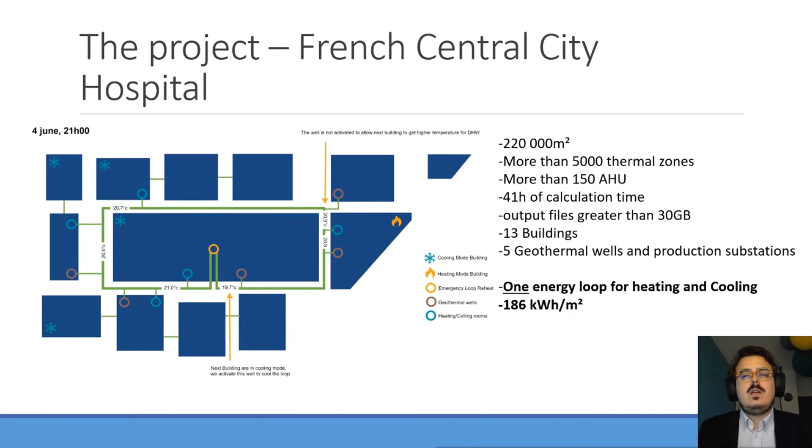Thanks to the system, we anticipate a low consumption of 186 kilowatt-hours per meter squared per year, 3 times less than the existing one. This slide shows the project complexity. This is the DesignBuilder model, including the 220,000 square meter buildings and its HVAC system. For the project, we had to keep this accuracy level inside each building and then represent the loop with all buildings working together. This work had to be done in 6 weeks with 4 teammates.

In a typical building simulation workflow, every engineer models a building and analyzes results on their own computer. This creates a lot of very large simulation files. If any human error occurs, we need to correct, rerun, re-export, and reprocess files. In a normal workflow, the final Excel post-process file is finally useful only for the project. With the new method, we only correct, but the simulation and export time is highly reduced by BI tools.

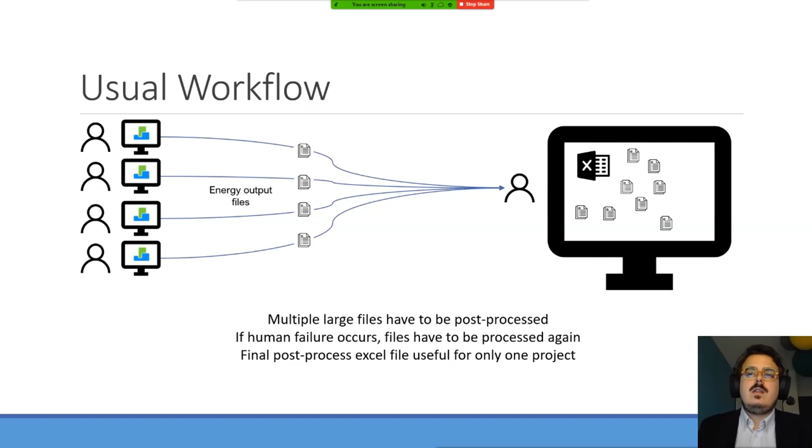In this case, the modeling is done on the engineer's computer, like usual. The EnergyPlus input files are generated from DesignBuilder. Then, thanks to DesignBuilder's simulation manager, we can easily run simulations on one more powerful server to run faster. Then, a script automatically organizes data in a database, in this case PostgreSQL.

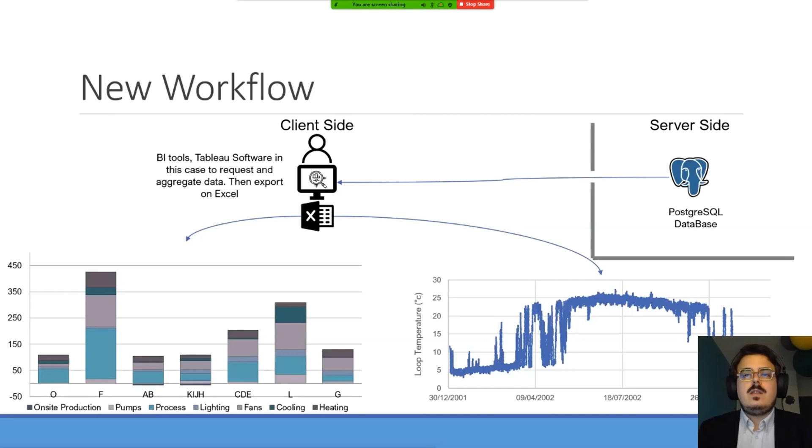When data is stored in a database, BI tools help the engineer to analyze, update, and aggregate the data much more quickly and easily. For this project, we were still forced to use Excel to do the final job, due to dynamic or stepped analysis. But the export is much easier with BI tools' help.

Like I said, we use software available in most companies. DesignBuilder is used a lot in France, and Power BI is included in Microsoft Office licenses.

This slide shows another view of the year's loop temperature analysis. The loop highlighted in green on the right depends on the wells' position and the buildings' mode at time t. So thanks to the previous exports, we have the full cooling and heating demands of all buildings already stepped. After inputting the first temperature for the first hour in green, all the rest is calculated based only on warm and cold rejection on the loop.

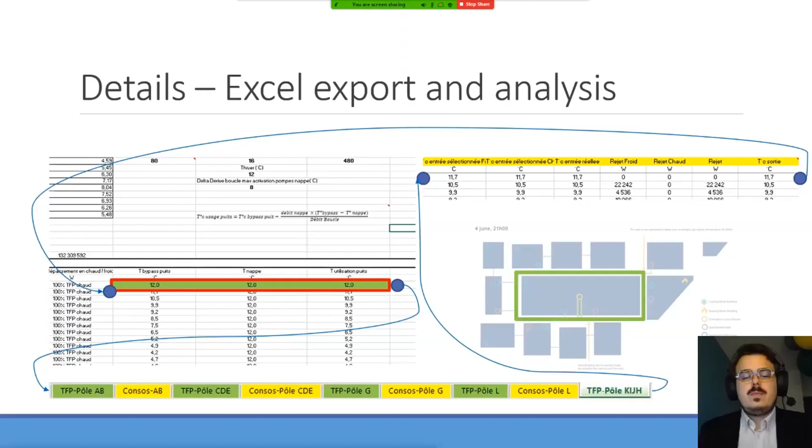To conclude, the project was so huge and complex that we could not have estimated its energy consumption without this innovative method. This shortened our study time by at least 2 weeks. We did some corrections the last week. This could not have been possible without the server. Our study proved that it was possible to guarantee the tempered loop temperature, which was our client's condition to keep this highly efficient system.

At last, the model was used to exchange with the HVAC business unit to adjust and propose good regulation rules and have an appropriate sizing of every production component at building level and district level. So, this method saves significant time and provides an easier way for the design team to share and use the simulation data.

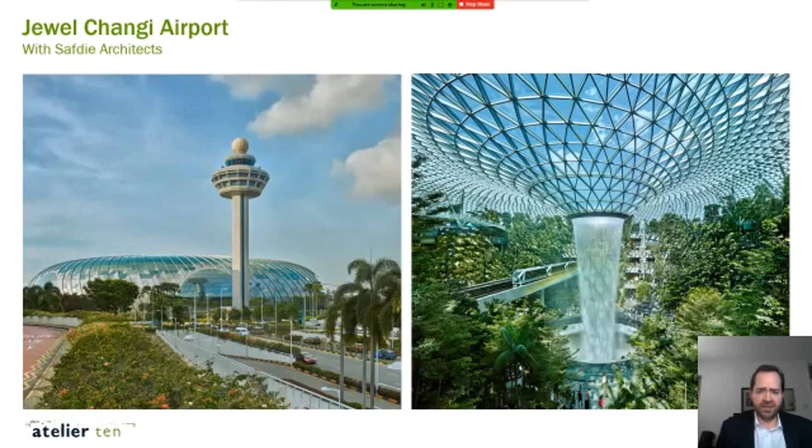Thank you for inviting Atelier Ten to talk about Jewel Changi Airport. The project is located in Changi Airport in Singapore and is fundamentally a retail destination. There's 100,000 square meters of retail and ancillary accommodation, plus a 20,000 square meter covered garden that is fully air conditioned. A key part of our work has been how we could deliver those spaces in an exceptionally challenging climate and an exceptionally challenging internal environment.

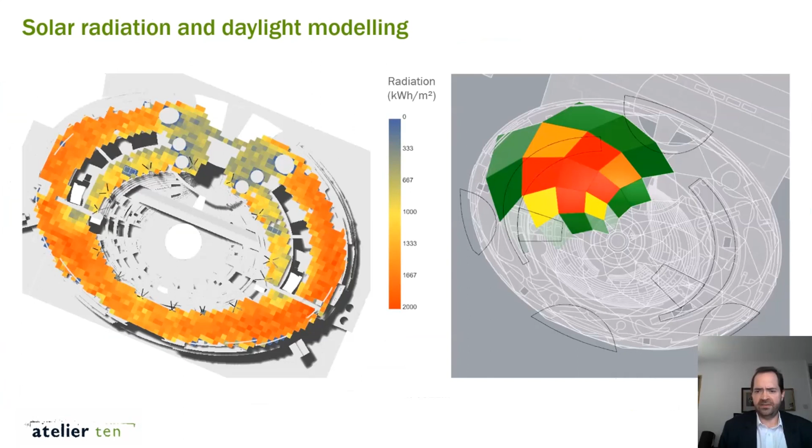We incorporated building physics analysis into the core of our workflow to be integrative and informative to the development of design, rather than just validating whether the design works at the end or not. As part of this, there's a lot of work done looking at daylight access from sky vault views through to detailed mapping of daylight and cladding sensitivity on different areas internally, through to detailed evaluation of how the sun tracks through the space, and detailed evaluations of internal thermal comfort.

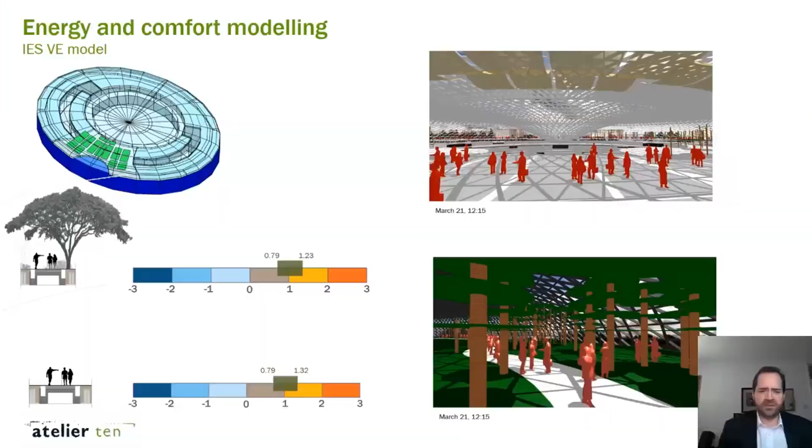However, there were two specific challenges to this project which required particular building physics analysis to resolve. We had the world's largest indoor waterfall, and we had a set of trains running through the building in counterflow, with two trains running each way every few minutes. The waterfall was a particular challenge as, quite simply, it had not been evaluated analytically in any great degree of detail before we undertook the work at Jewel Changi Airport.

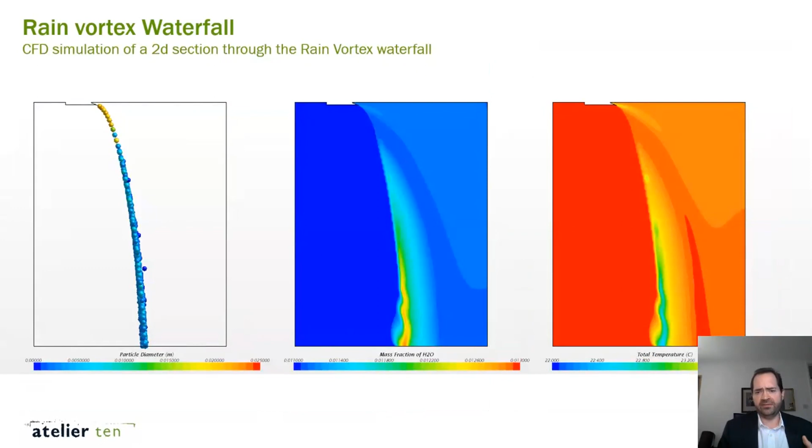We had to evaluate how the droplets of the waterfall would create air motion, and we did this in two ways. We started with statistical analysis, looking at drag factors on individual water droplets and scaling that up. We also looked at a top-down approach of dropping droplets in a CFD model to assess how those entrained air around them. Once we converged those two approaches into a common understanding of the air motion, we were able to merge that from a 2D model into a full building model.

The initial results were not great. We were seeing very fast entrained air coming out of the waterfall, which was far faster than would be comfortable, and would also dramatically de-stratify the space and render the displacement ventilation and conditioning system unworkable.

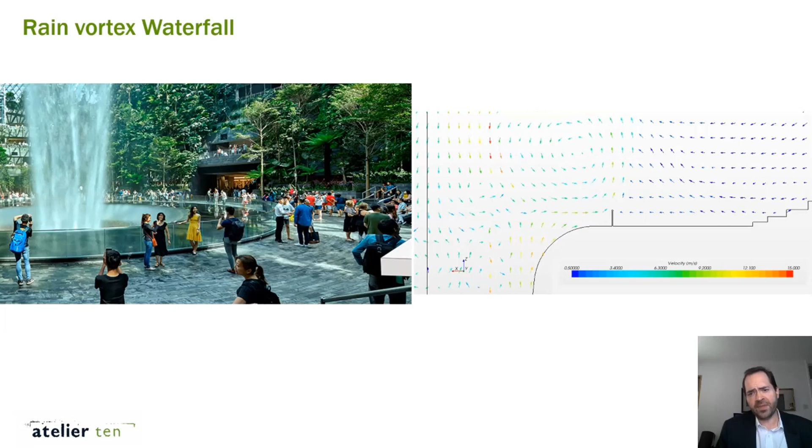Working with the architects, we looked at the airflows projected from the CFD models to develop this quite delicate glass balustrade. As the air comes out of the vortex at the base, it entrains across the surface and is pulled towards the rest of the space. The balustrade simply kicks it upwards vertically and creates its own air curtain from the air movement it introduces to itself. This creates a kind of storm cell inside the vortex of incredibly fast-moving air, but leaves the rest of the space very serene. We tested this through CFD and then validated it through limited physical mock-ups. But without this, the space would have fundamentally not worked.

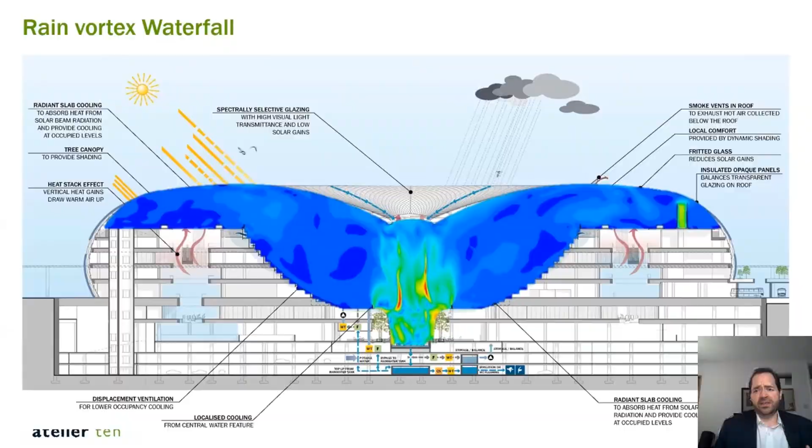Alongside that, we had the challenge of the train. No one's really built a building with trains running through it on a regular basis while still trying to maintain quite close control conditions across the spaces.

We had to look beyond our standard toolset to look at this, and partnered with Siemens and CD Adapco to use some of their advanced clusters to model the effects of the train.

We'd previously identified a need for fast-acting roller doors on the sides of the buildings, but due to the speed of the trains and the frequency, they were not able to fully close before the train passed through them in an airlock configuration.

Using a dynamic CFD model, we were able to assess how much air moved into the building and out of it, and found this very interesting effect: while the train comes through, some air gets dragged behind it. But the counterflow of the train coming out the other way actually helps drag air back out of the building, meaning the net effect of the airflow is relatively minor and could be accommodated through local detailed design of the conditioning system near the throats of the trains' entry into the building.

We worked on the project from competition through to completion, using analysis every step of the way. Through the construction on the site, we continued to validate and work on the analysis, progressing its detail through to the completion of the project as more information became available, making sure decisions made on site were appropriate and responded to what the building needed to do.

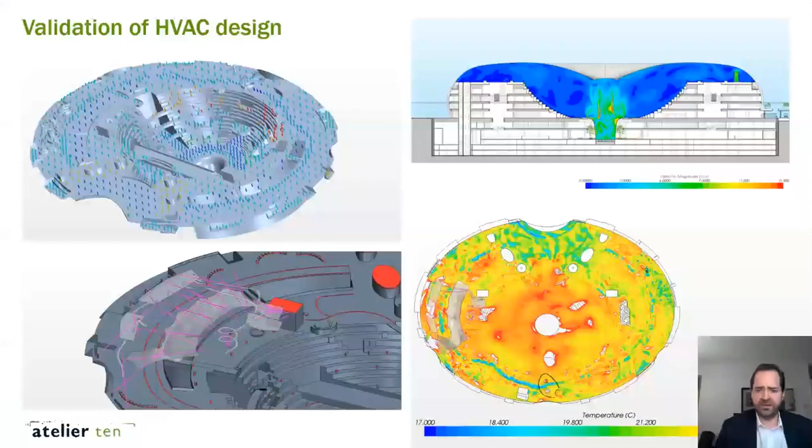When it opened last year, we found this amazing space, the kind you just walk around and people smile, looking with joy at the building. Without the building physics on the project, we don't think we'd have had the same reaction, and we wouldn't have had nearly the same space.

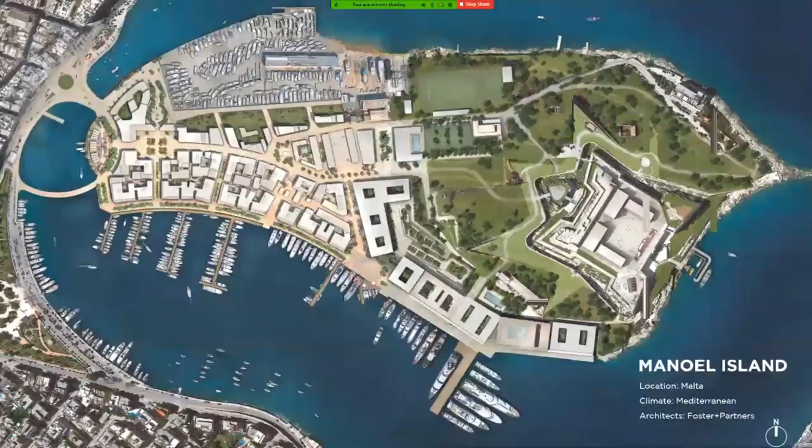The climate is classified as a hot summer Mediterranean climate with 4 distinct seasons. Summer temperatures exceed 30 degrees when it can be quite hot and dry. The winter period is cooler but humid, and there is still a genuine need for heating.

To prepare the sustainability brief for the master plan, we reviewed several international standards to identify sustainability measures appropriate for the project. From this, we developed a bespoke sustainability appraisal framework that included agendas responding to the local context through an amalgamation of best practice measures identified from these standards. As part of the framework, we carried out extensive environmental design work, which I will go through now.

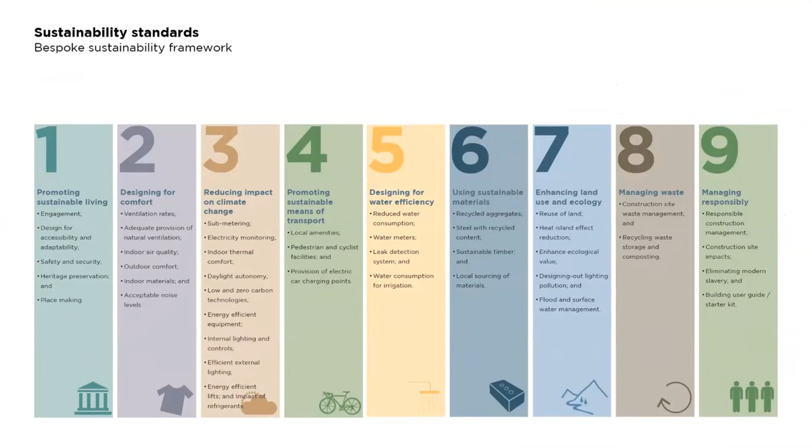We see building simulation as a method to refine a good design into an excellent one. To ensure solid design foundations, we prepared 7 principles for early stage massing, which focused on orientation, arrangement of buildings, scale of courtyards, hierarchy in spaces, shading methods, materials, and creating an environmental transition experience.

Moving on to optimization, we utilized several tools for our simulations. Bulk of the work was done using Ladybug and Honeybee. We used Xflow for running our CFDs and TAS for thermal modeling and validation work.

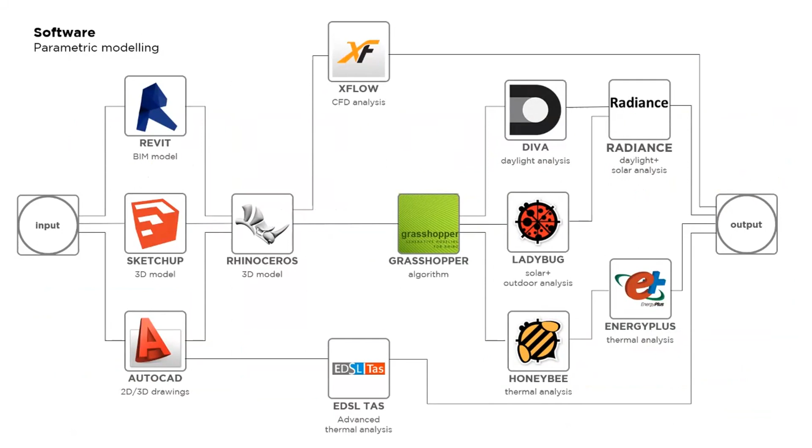Once the initial massing was formulated using the 7 principles, we carried out an early stage shadow analysis to quickly understand its impact on the outdoor spaces and the quality it created. The rapid feedback using this technique allowed us to tweak it before we started applying more advanced techniques.

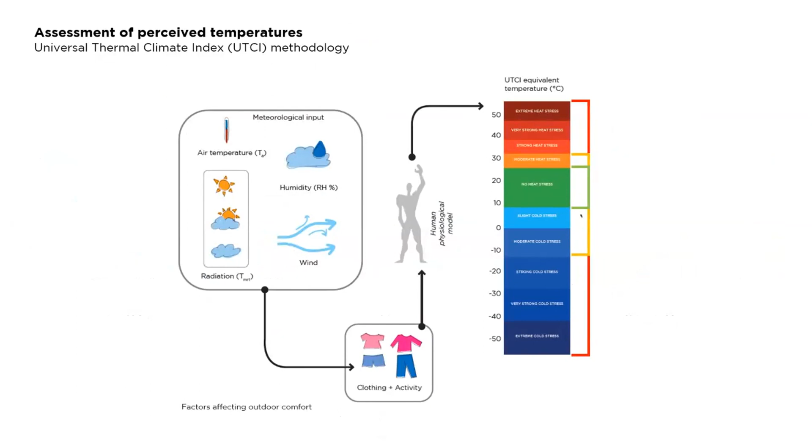With the refined massing, we started assessing outdoor comfort using UTCI to identify areas of heat or cold stress. This was done for a typical summer and winter day in the morning, afternoon, and evening, when the spaces would most likely be in use. This helped identify hot spots that needed additional shading features to enable comfortable outdoor spaces for users.

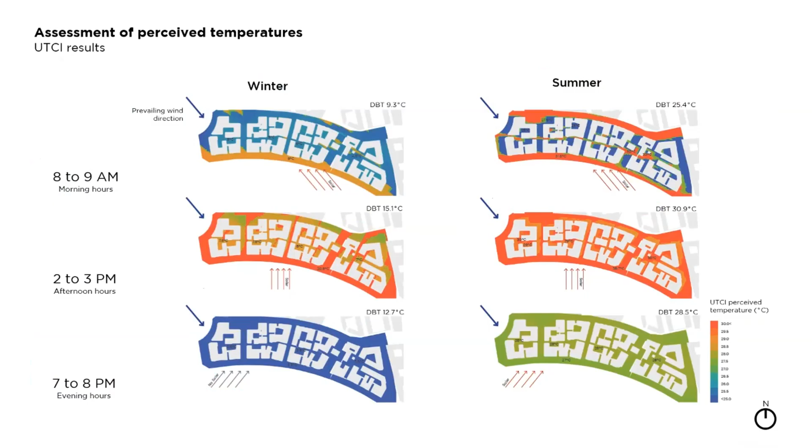We used CFD analysis to check for overly windy conditions that would make the outdoor spaces unusable. Once the courtyards were defined, we did a detailed study of available sunlight hours to identify suitable spots for landscaping. For each location, we assessed the sunlight conditions to assist the botanist in selecting the most appropriate tree species.

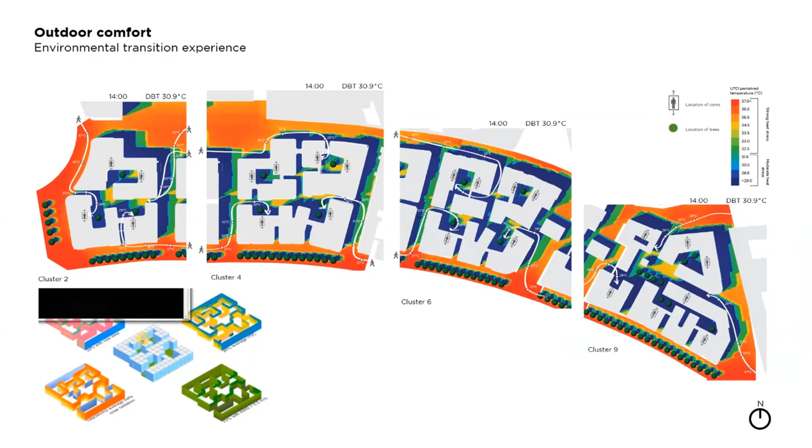We also utilized the UTCI technique to create protected routes. Our design intent was to create a series of shaded and semi-shaded spaces for a gradual change in temperatures experienced by an occupant when moving from indoor to outdoor, to prevent thermal shock. We modulated the massing to ensure there was a gradual thermal transition for the users.

Since vegetation was integral to the courtyards, we also assessed the temperature benefit from the planting. This further helped fine-tune plant placement and pedestrian routes. This render on the left illustrates how we were able to create different microclimatic environments in the courtyards.

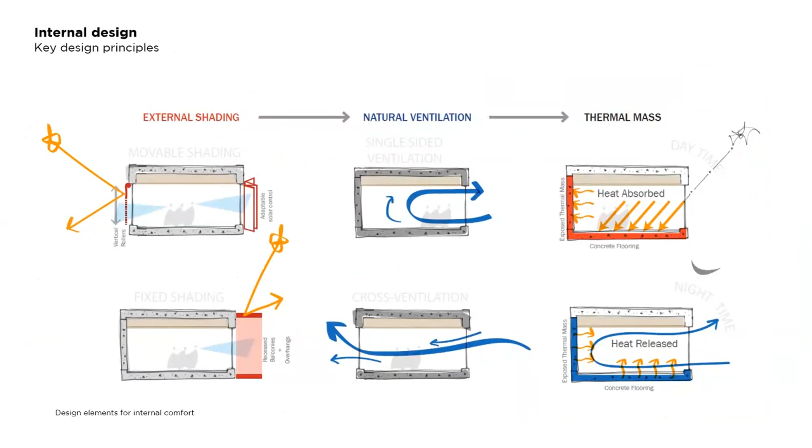Moving on to internal design, we again identified key bioclimatic principles appropriate for the local climate, looking at external shading, natural ventilation, and thermal mass. There were two key design typologies identified by the architect for the design language.

As part of the facade optimization process, we carried out over 2,450 unique simulations and produced a design matrix which captured combinations of orientation, exposure, and glazing proportion for the two typologies.

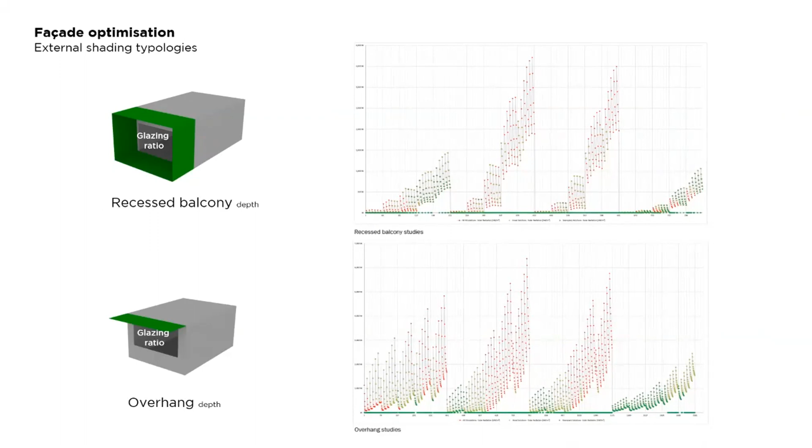With these results, we created a bespoke ranking algorithm to find viable solutions that create the ideal balance between thermal and visual comfort. Using a simple traffic light system, the design matrix helped the architect select the most appropriate facade option for different areas of the cluster.

Once a preliminary option was selected, we carried out detailed analysis on the effective depth of horizontal and vertical projections to find the point of diminishing return of environmental value and energy performance.

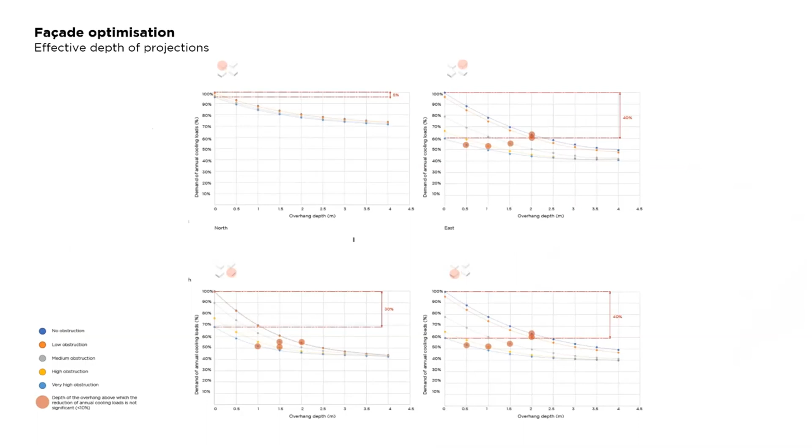For a typical south facade, we achieved a 76% reduction of incident solar radiation and 62% reduction on the west facade. For all orientations, especially east and west with low-angle sun, we assessed different options for glazing and shading controls that will help reduce solar radiation whilst maintaining sea views and privacy.

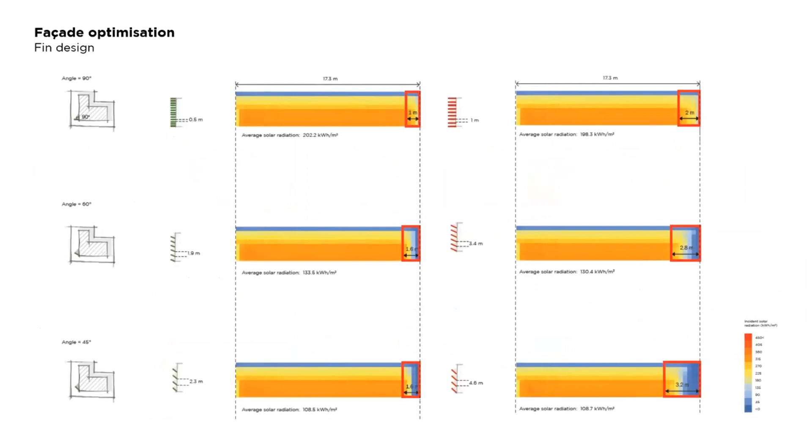We also interrogated the angle and spacing of fins as an external shading element, and as a result, we developed a movable screen on the facade which the occupant can slide across their windows when they want to block the sun whilst maintaining views and daylight.

Towards the end of the design stage, we conducted robust validation checks using dynamic thermal modeling to confirm the performance was as predicted. This was done by testing for overheating risk and to check that we met our targeted potential hours for natural ventilation.

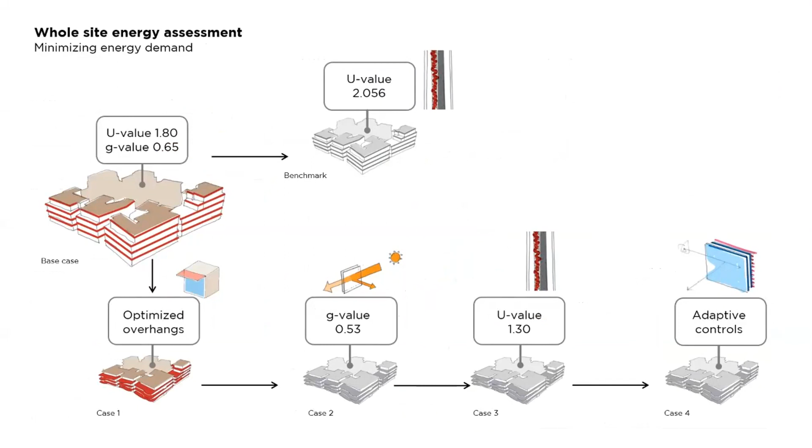For validating visual comfort, we used daylight autonomy as a metric to assess the quality of natural light in the space. Lastly, we carried out an iterative site-wide energy assessment to demonstrate the overall reduction in energy demand by the optimization process. As a result, we achieved a site-wide 40% reduction in energy demand just by passive measures alone. Thank you.

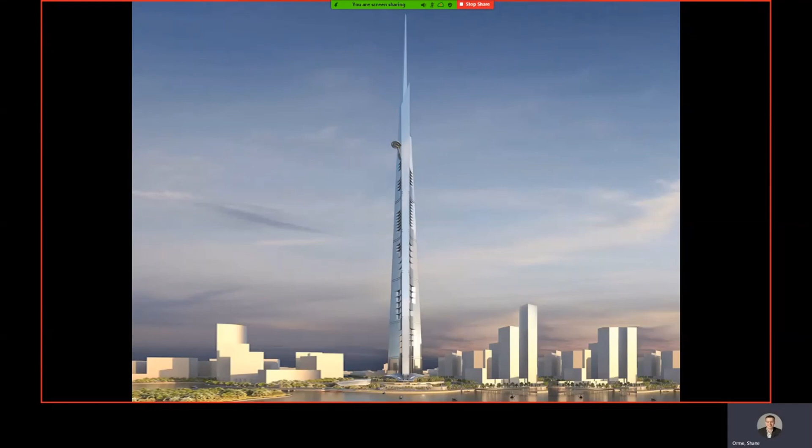Good afternoon, everyone. I'm here to talk to you today about a project I was involved with about this time last year, in which we were helping support the architect in developing their bid to design the world's tallest tower. One of the main design challenges we experienced over the project was the actual height of the building.

You can see here, in relation to some of the other world's tallest buildings, notably the Burj Khalifa at 830 meters, the Jeddah Tower at 1,000 meters, and our building, which over the course of the design project varied between 1 kilometer and almost 2 kilometers.

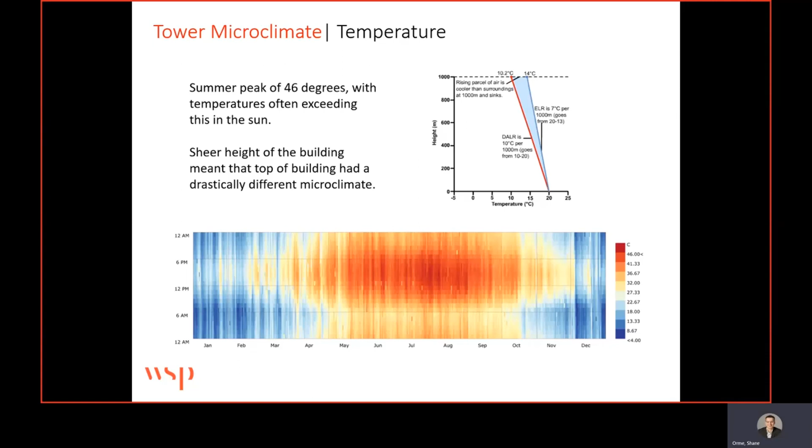The other major challenge was the arid desert design conditions, with a summer peak temperature of 46 degrees and a winter temperature around 5 degrees. Keen mountaineers will know about the dry adiabatic lapse rate, which means that for every 100 meters you climb, the temperature drops by about 1 degree. This meant the top of the tower had drastically different design conditions from the base - about 15 degrees cooler in the summer, but also at risk of freezing for large parts of the winter. So we had a constantly changing concept design, a very aggressive 3-month project timeline, and very challenging environmental conditions.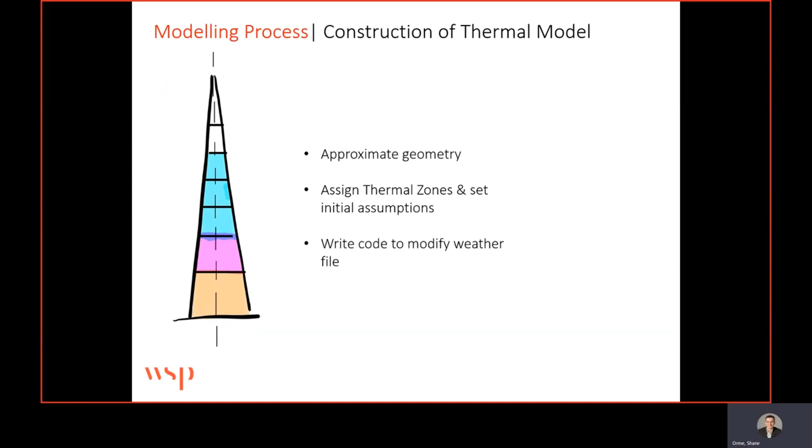We were given information from the architect in the form of building height, building width, and typical floor plates, so I thought this would be a perfect opportunity to develop a parametric model using Grasshopper, Honeybee, and Ladybug modeling suite. Using this, we were able to approximate the building geometry, assign thermal zones, and set MEP assumptions for each building zone. We wrote a piece of code to modify the weather file so the environmental conditions were different for each floor of the building.

So we were able to simulate each floor and then iterate this simulation up the entire length of the building in order to come up with the total building heating and cooling loads, as well as run daylight factor simulations and a radiation massing study.

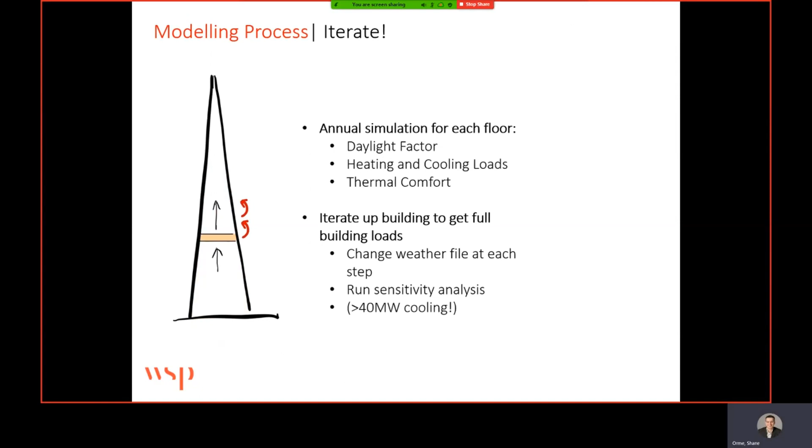Overall, we were able to receive design information and generate a series of design outputs, running a series of sensitivity analyses, including a surface radiation study, daylight factor analysis, and concept energy analysis. We were then able to feed this information back to the architect to inform design decisions in an iterative process.

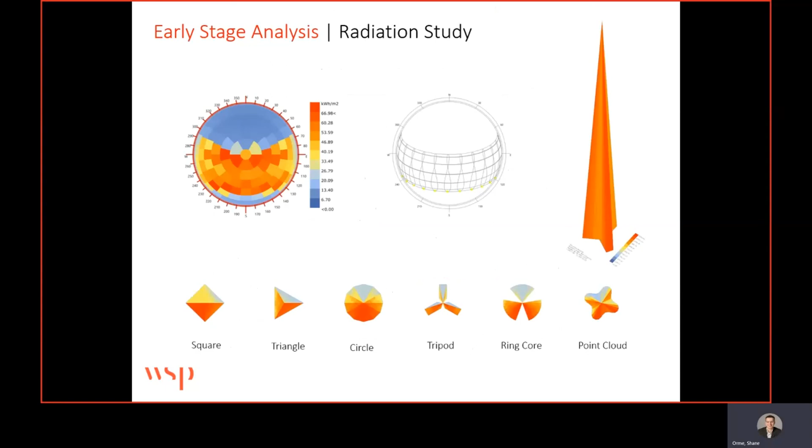The first thing we did was an initial radiation massing study where we looked at different forms of the building. We found that a triangular or tripodic building form had better overall radiation performance versus a more traditional square shape, triangle, or circular shape.

We also ran a daylight factor and cooling load analysis. This highlighted that the very deepest office floor plates had very little access to natural light.

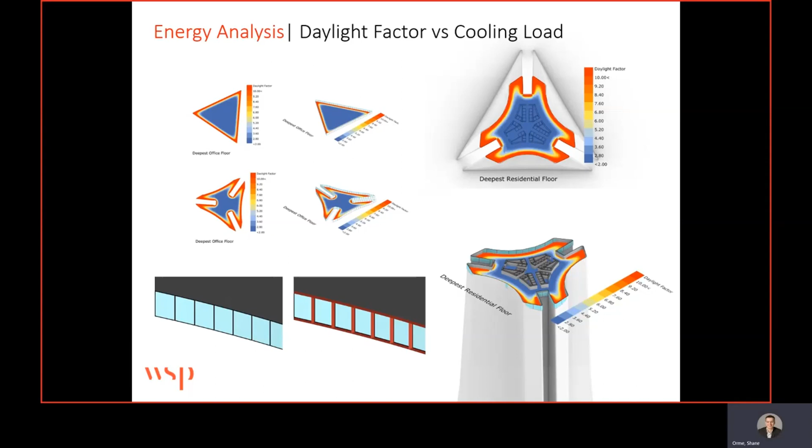So one strategy proposed by the architect was to introduce slots into the building, which had the combined effect of increasing the daylight factor and access to natural light, while not significantly impacting the cooling load.

So we've been developing this model for about a year since then. We've added a few extra features. In addition to running sensitivity analyses, we are now able to run optimization studies of these different design decisions based on a genetic evolutionary algorithm.

And we've also extended the capability of the model to start looking at some more detailed design decisions. Some of them are shown there on the side.

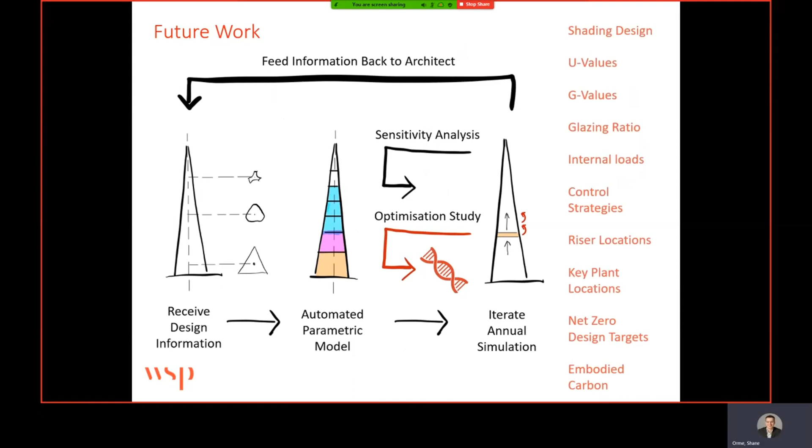Right, I think that's about all I've got time for today, but I'd just like to thank everyone for listening, and I'll happily answer any questions. Thanks.

Very good presentation. Thank you very much, Shane.

I've got two questions. The first was, I'm quite interested to know a little bit more about the code in terms of altering the weather file and then how you simulate that to apply across the height of the building. And the second was whether you considered any beneficial gains and losses associated with where you are in the building and the height of the building, and how energy could potentially be shared.

Yeah, so that's a good question. Basically how the simulation worked was that it did a typical floor of the building. So it calculated each floor of the building separately and then iterated that process as you climbed the building, repeating it on each floor.

The geometry would change as you shifted up the building. We also had a program schedule from the architect, because it was a massively mixed-use building. So we had offices, a 5-star hotel, residential buildings, lobby areas, which all had different MEP input assumptions, so different loads and things like that.

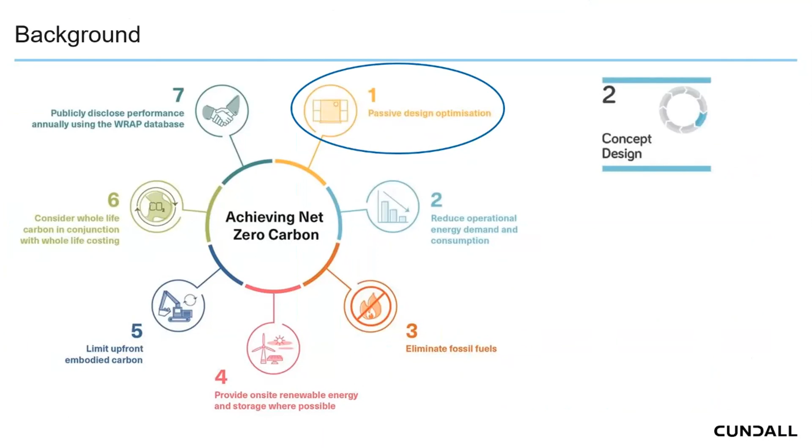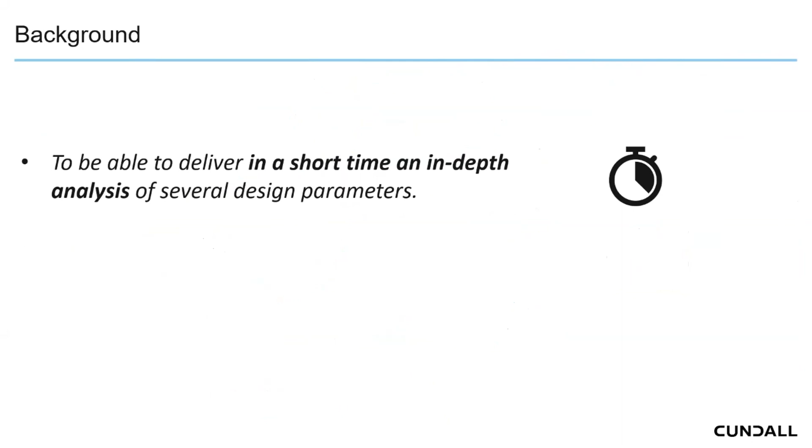Several design features have to be investigated at the early stage through the lens of energy use, daylighting, and thermal comfort, as well as resilience under future climate scenarios. To achieve this level of detailed design at early stage, we have been developing tools to automate and optimize design workflows, from energy calculations to daylighting and thermal comfort assessments. With the following objectives in mind: to be able to deliver in a short time an in-depth analysis of several design parameters, and to reduce time spent in tasks that don't have any engineering value and increase time spent in analyzing the results and their impact on the design.

When assessing thermal comfort, to validate the efficacy of a design, 3 main methodologies are used in the UK, and these are CIBSE TM52 for commercial buildings, CIBSE TM59 for residential buildings, and BB 101 for primary and secondary schools. IES is one of the software most used in the UK industry to carry out these assessments. Within IES, it's possible to produce an Excel report for TM52, but not for TM59 or BB 101 methodology. To calculate this, as well as the impact of different internal airspeeds, additional calculations have to be carried out in Excel, which is an extremely time-consuming task.

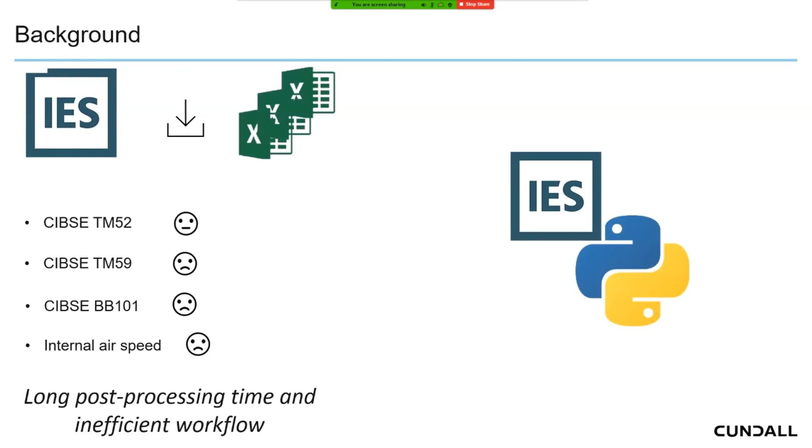Luckily, there is a Python environment within IES that allows the development of customized scripts. What I did was to develop a script to optimize how we carry out these assessments. The first objective was to embed all calculations for each assessment within the script, to be able to run multiple weather files, to embed calculations for several internal airspeeds, to output the results in a user-friendly format, such as Excel, and to develop a script that can be used by any IES user without any Python knowledge.

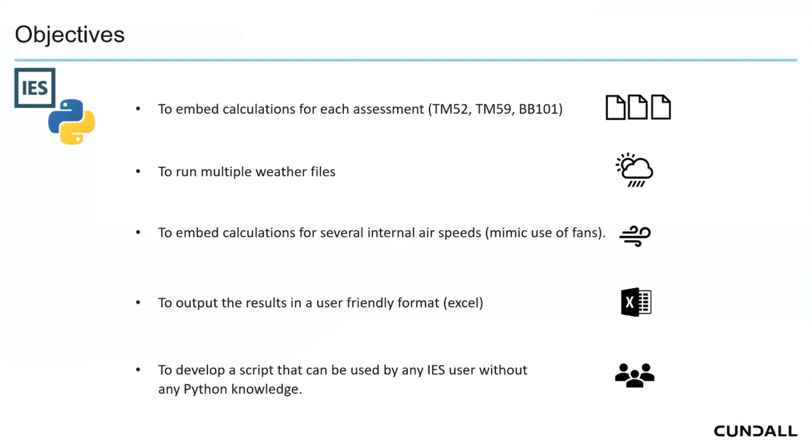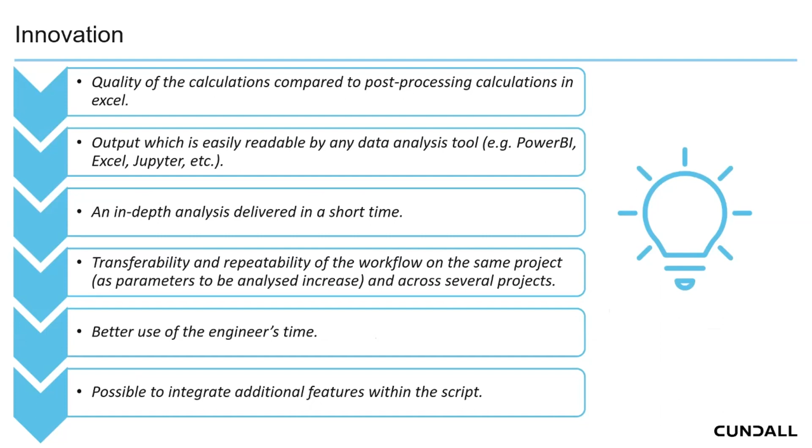The use of this workflow guarantees quality of the calculations compared to post-processing calculations in Excel, an output which is easily readable by any data analysis tool, an in-depth analysis delivered in a short time, transferability and repeatability of the workflow on the same project and across several projects, better use of the engineer's time, and the possibility to integrate additional features within the script, such as calculations that go beyond the methodology requirement.

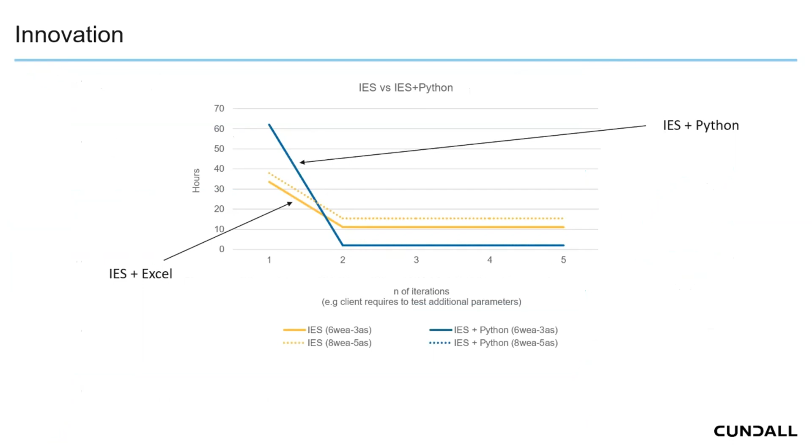This graph shows a comparison between a traditional workflow, which is IES and Excel, and the developed workflow, IES and Python. On the y-axis, we have the time, and on the x-axis, we have the number of iterations. Assuming we have to start from scratch in both cases, writing the Python script requires a longer development time compared to setting up the same calculations in Excel. However, as the number of iterations increases, in the Python workflow, the time required to complete the same task is a small fraction of the time required to carry out that task using IES and Excel. And as the number of parameters to be analyzed increases, the gap between the two workflows is even bigger. This shows how the use of the developed script highly increases efficiency in delivering these tasks, making best use of the engineer's time.

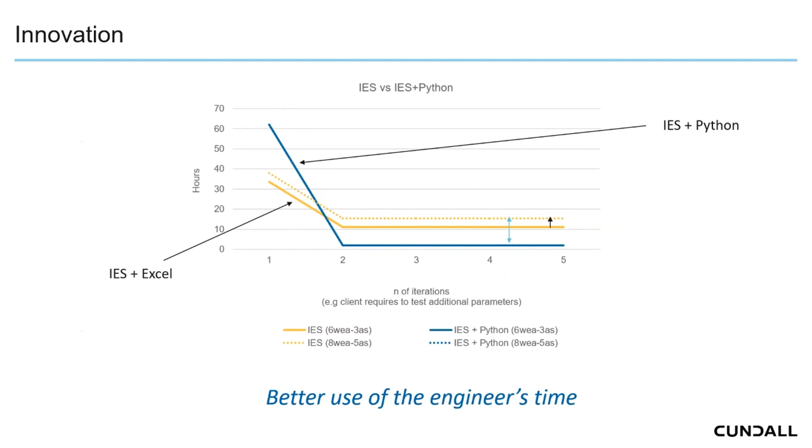This workflow has been used on several projects for residential, schools, or commercial buildings. Among these, a number of net zero school projects we have been working on in the last months, where the analysis of several parameters and climate scenarios for different locations in the UK was required at concept stage. The use of this workflow across projects shows one of its strengths, which is transferability and repeatability, as well as the capacity of delivering in-depth analysis in a short time.

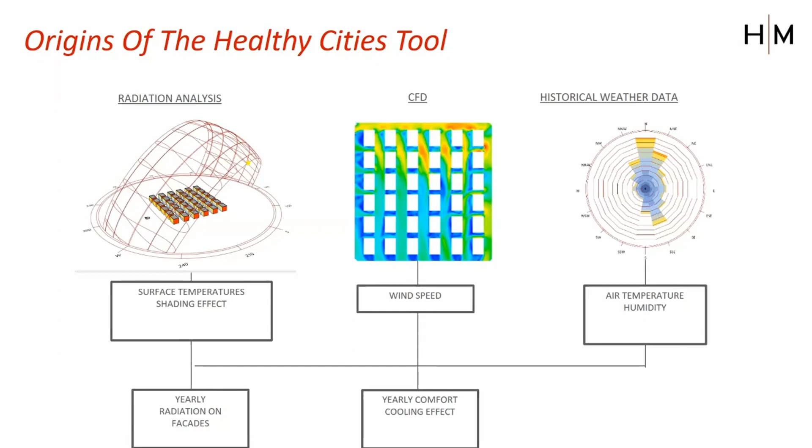So we used Rhino and Grasshopper not just to coordinate the geometry, but to run the simulations directly within the Rhino environment. Then over the last couple of years, having established a decent platform, we've started bringing in other environmental assessments like acoustics and air quality. And you'll see in a minute how South Korea made good use of those. And also the ability to very quickly compare designs with a design explorer.

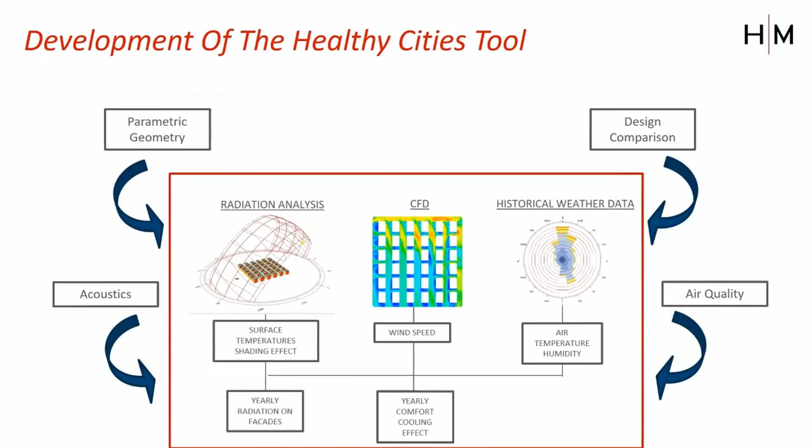Korea is at the eastern end of the Asian continent, so it's got a very continental climate, very hot summers, very cold winters, so challenging thermal conditions. Also, there's a lot of pollution coming not only from Chinese industry, but also a lot of dust coming off the deserts over there. And in the Korean cities, there's a fair amount of traffic issues, and that affects not only the pollution, but also the acoustics as well.

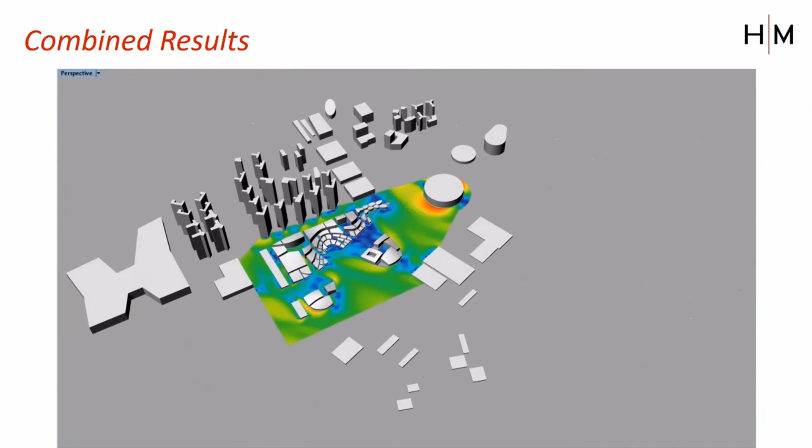So here's a brief overview of the master plan that we were working on, in particular the top end of that image. There's a plaza area in amongst the pink blocks. It's a bit difficult to really show how we drive the models from within Rhino in a presentation like this, but you'll just have to take it from me that these results aren't images that are just within the Rhino model. They're actually being driven and produced within the Rhino environment.

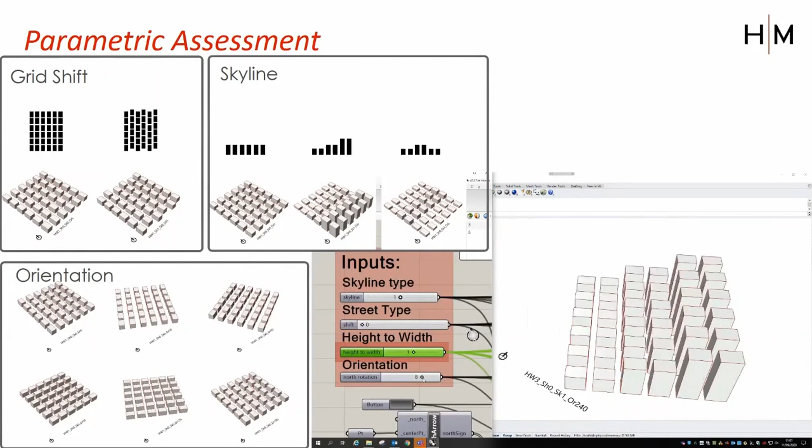The other thing we've done on this project is a parametric assessment using the local climate data to look at how the streets should line up in their orientation around the compass, but also whether the highest building should be in the middle or at the outside edge, and whether the city street grid should be shifted maybe. And we can discuss the various pros and cons of these things with the architects, the clients and the stakeholders, particularly by using the Design Explorer that I mentioned. This one's looking at various levels of thermal comfort, but it can also apply to getting a balance between thermal comfort and acoustics, where these are sometimes competing metrics.

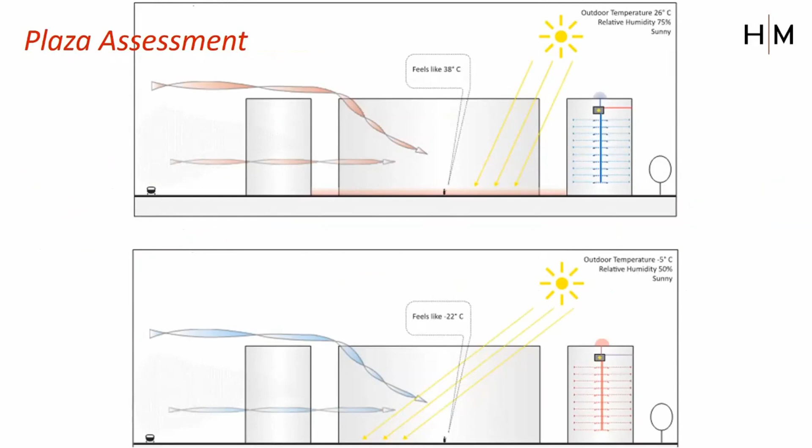And then finally, I'll take you through the overall nature of the design process that we went through. So this is how the conditions would be felt if the city blocks were just straightforward extruded blocks all at the same height. You can see that in the summer it feels like 38 Celsius, and in the winter it feels like -22. So very challenging conditions.

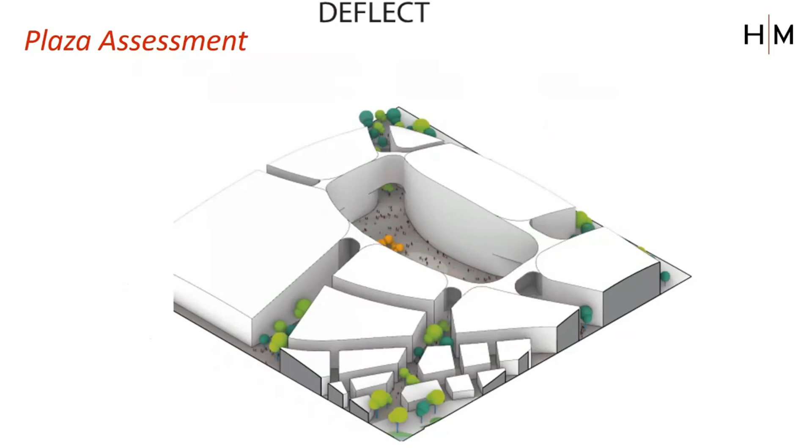But by optimizing the overall shape of the master plan, making it higher in the middle and lower at the end so that the wind flows over the top, by deflecting the wind that is steered down the canyons, this is all about optimizing conditions in the plaza space, by blocking off those canyons at a higher level, and also by adding just a little bit of solar shading, which also helps the aerodynamics of the buildings. We're able to add a fourth thing in addition to optimize, deflect and protect. We're also able to take some of the air from the buildings and blow it into the plaza area to slightly pressurize the space.

And because of all the shielding that's going on, in the summer we've got the conditions within the space down to about 25 Celsius, and in the winter we've got it up to about 0 Celsius. And the client was extremely happy with these indications.

And just very quickly, I know I'm a little over time.

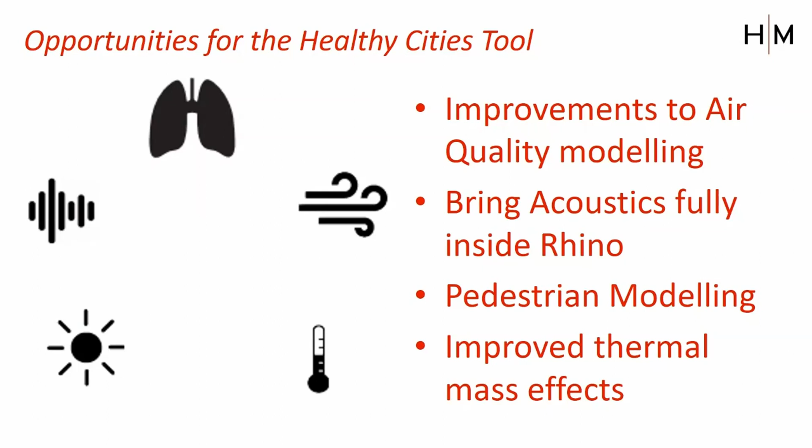Some of the things we're working on to improve the Healthy Cities tools: improving the quality of both the air quality and thermal mass modelling, improving the accuracy of the modelling there. Also, the acoustics at the moment still has a little bit of human intervention, but we're hoping to bring that to a close. Thanks very much.

Thank you very much for that presentation. Again, a lot of information there in quite a short period of time, Joseph. What I'd quite like to ask about is the acoustic aspect. Acoustics and acoustic modelling is something we don't do enough of, I believe. So could you tell us a little bit more about that in terms of how you modelled it and what the key variables were?

Well, the work we're doing, it's all very, very early stage. The acoustic modelling is mostly done with CADNA, and the models are generally set up through Rhino. There's still a bit of work, as I said at the end, we're trying to bring that inside the Rhino environment. There's still a bit of human intervention that's needed.

But the models are very simple. Just to give an indication of the impact of traffic, we're doing some impacts of softening walls, that kind of thing, and porous screens. It's not very detailed, the acoustic work. It's one of those things where with this platform, we're starting to keep things very simple and then grow them from there incrementally rather than put a great deal of detail in at once.

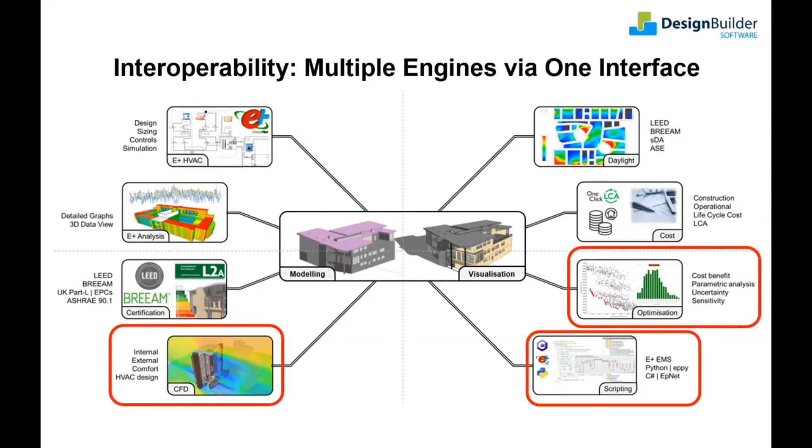You can improve interoperability in two ways. Firstly, by one interface interoperating with all the calculation engines a modeler requires, using one model for certification, energy, comfort, daylighting and CFD simulations. That's been the approach used by Design Builder. But advances in technology and changing design practices are pushing this approach to its limits. I'll use examples including CFD, optimization and scripting to explain why.

Design Builder's current CFD engine can meet most common building-related CFD needs, but it can't model particulate flows or pathogen dispersal and containment measures. The pandemic has increased the importance of these aspects. To help us meet these and other requirements, we'll soon be providing a user interface for the well-respected OpenFOAM CFD engine. So from one Design Builder model, you'll be able to generate OpenFOAM results and input and output files, alongside the Energy Plus and Radiance results and files already available, including your Energy Plus results as CFD boundary conditions. That should minimise the need for data transfer between different simulation tools.

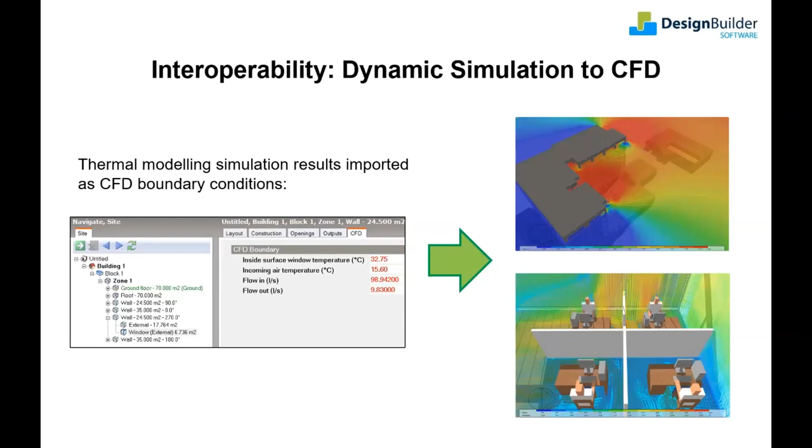We're now actively developing software to improve data transfer between tools, including via an API we released recently. The API allows users to develop their own applications to interoperate with Design Builder. The API and wider interoperability capabilities will be enhanced in the months and years ahead.

The increasing complexity of building HVAC and control systems has increased the need to customize some simulations, normally via scripting. In its basic form, scripting allows the user to pre- or post-process simulation data, for example, to produce specific output reports. A much more powerful application is to use your script to modify the model behavior at each time step during a simulation. So, for example, you could replace the simulation engine code with the manufacturer or design team's control logic to ensure the simulation matches real-life equipment operation.

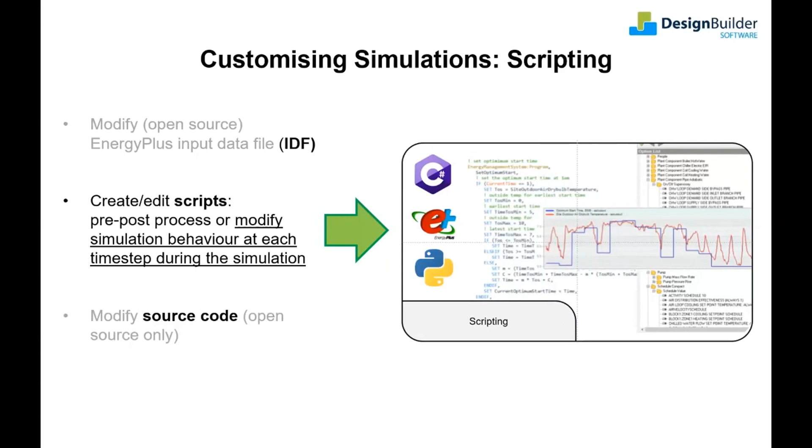Optimization is a capability enhanced by the availability of cloud computing. You set up the optimization model on your local machine and then run the simulations much more quickly on a network or cloud server with multi-core processors running simulations in parallel. We'll be extending cloud computing beyond EnergyPlus simulations in the years ahead.

Last but not least is existing building calibration. Calibration develops a design stage model so it reflects operational reality, helping building managers to optimise operational performance, including energy efficiency and occupant comfort.

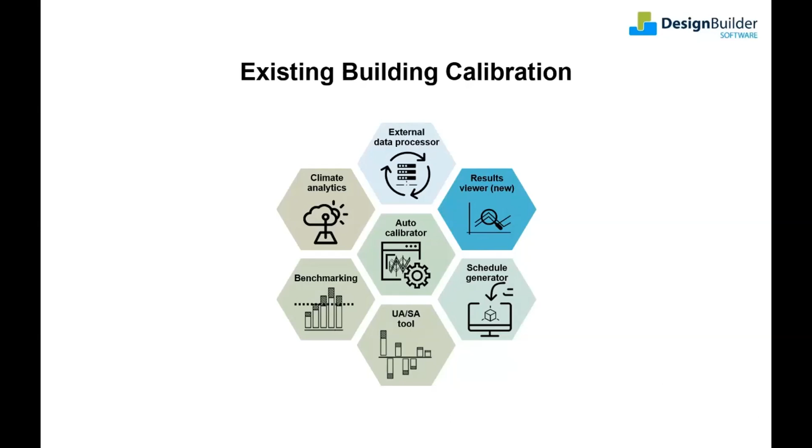Calibration was discussed in the recent TM69 operational modelling webinar we did with CIBSE, and the recording is still available from both the CIBSE and DesignBuilder websites.

Hopefully you found this glimpse into the near-term future interesting, and it's given you food for thought going forward.

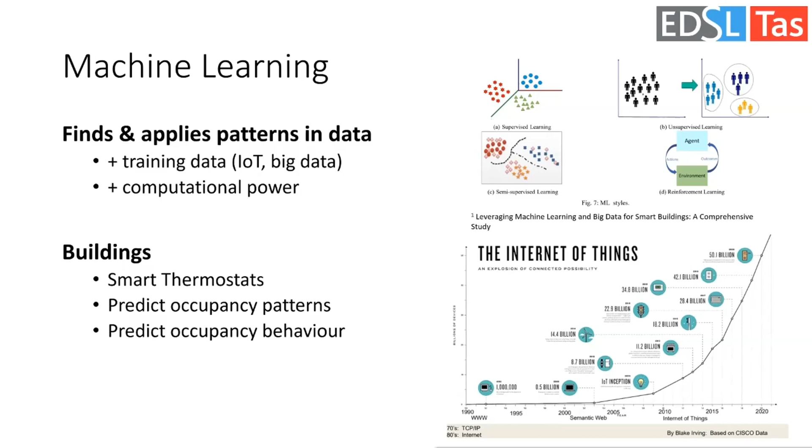In terms of building design, we need to be able to simulate the operation of these machine learning models. We can also use machine learning to speed up simulation times and even help people create their digital models faster.

Another area that's gaining interest concerns modeling occupant behavior. Currently, we tend to model occupancy and equipment gains as static, but in reality it tends to be much more stochastic. Occupants tend to enjoy their environment more if they can interact with it by adjusting lights, thermostats, blinds, and windows. And they also affect the small power consumption. And uncertainty from occupants is very costly.

One study demonstrated that sizing a PV array to be 99.9% certain of net zero energy costs 50% more than one that is 90% certain. It's therefore very important that simulating occupant behavior leads to robust design. We need to make it very difficult for users to make inappropriate decisions.

You may have seen the smart glass used in toilets in Tokyo. The same technology is very useful in buildings, particularly if the solar transmittance can be controlled independently to the light transmittance. We could have facades that allow the sun to provide more heat in the winter and reject it in the summer based on weather forecast predictions. And again, the control of these systems is something we'll need to be able to model in order to refine the design.

There are also continuous advances in energy storage technologies. Take batteries, for example. Different batteries have distinctly different characteristics. If the population shifts to primarily electric vehicles, we may be able to use the car batteries in the building's parking area to smooth out peaks in the energy demand where renewables are relied upon. But we'll need to make sure that we give the employees enough power to drive home with.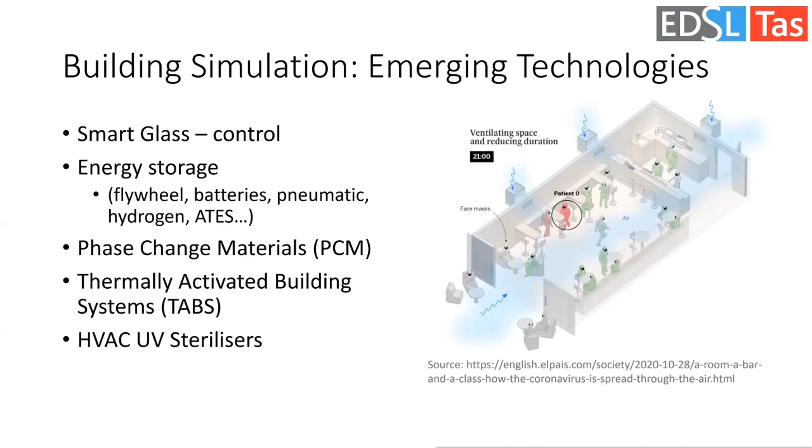As usual, raw computing power continues to increase, and with that comes opportunities. Wind pressure coefficients and openable proportions tend to be a big source of uncertainty in natural ventilation calculations. We can more accurately estimate these using modern fast CFD for both exterior and interior modelling.

We can start modelling CO2 factors that vary throughout the year. We can implement algorithms that generate future weather data from arbitrary weather data, such as data gathered by on-site weather stations. We can attempt more ambitious optimization and parametric design projects, though we'll need to spend some time thinking about how to present the vast amounts of output data to our users, because sometimes a lot of data can be a bit overwhelming. And we can combine a number of techniques and technologies to provide real-time results while we're actually creating our geometry, such as daylight calculations.

Accurate glare analysis is particularly important if we're modelling occupant behaviour, as occupants tend to put the blinds down and leave them down, even when the risk of glare diminishes, so it's important that we avoid glare in the first place. And we can increase the temporal resolution of our simulations in order to capture some of the more intricate interactions between buildings and their occupants.

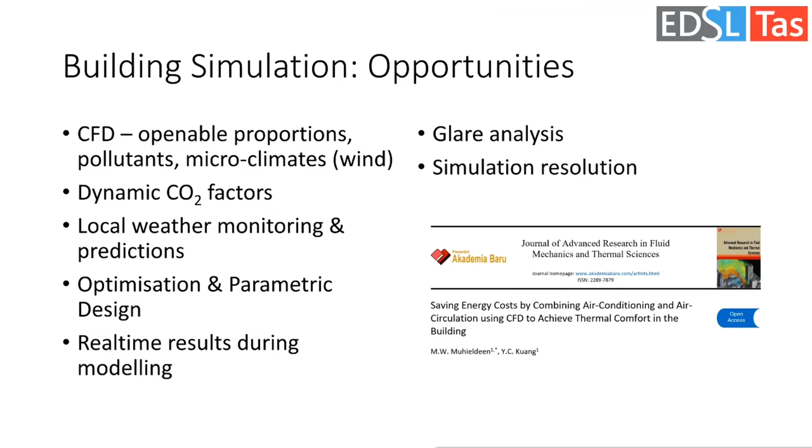Last but not least, one very significant opportunity lies in calibrated energy models of existing buildings. If we're going to reach our low carbon goals, existing buildings will need aggressive renovations, but sometimes it's hard to justify significant changes to envelopes and HVAC systems when the initial costs are very high. By creating digital twins of buildings, we can accurately predict the effect of renovations and calculate relatively accurate payback times. We can also quantify how much has actually been saved after undertaking renovations and connect this model to their building management systems to take the improvements and monitoring further.

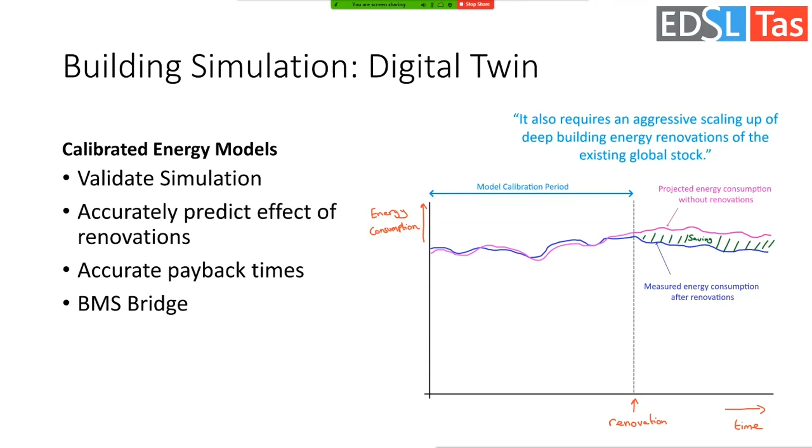I know I've covered quite a lot at a high level and have been quite ambitious about what I think is possible in the next 10 years, but I think we're going to have to be in order to have a real impact on climate change. After all, buildings are quite long-lived. I'll make these references available somewhere in case you want to look into anything I've talked about in more depth, and I look forward to your questions.

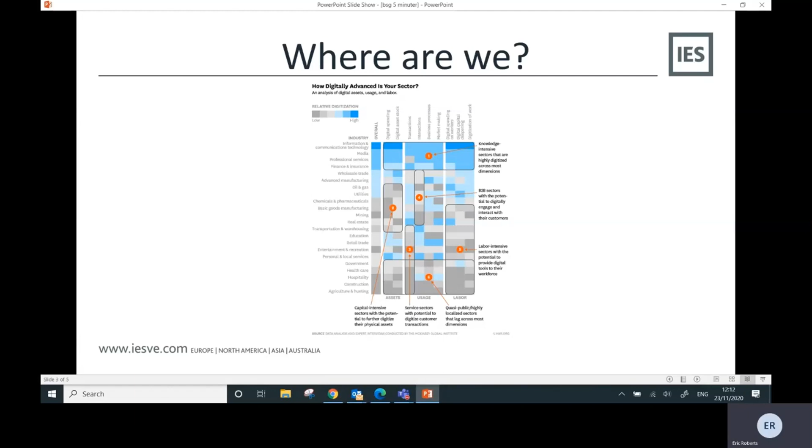So where are we going to be going? How can we do that? Whilst we've come a long way in the last 20 years, moving from a paper environment into a digital, hopefully 3D environment, but not in all cases, where are we actually going to go?

We've brought the use of building simulation from quite a niche activity, although somebody may argue it's still a niche activity within the construction industry. We've been looking at one building at a time. Predominantly, its growth has been compliance and regulatory driven, directives forcing implementation, more of a stick than a carrot. Energy has been cheap, and is still relatively cheap, and developers aren't the end users of buildings, they're selling assets on. They're not bothered about the long-term running costs.

As we move into a realm where we're looking at decarbonisation and low and zero energy buildings, we need to start looking at a wider and longer term time frame than this. We need to go from one building at a time to looking at multiple buildings, looking at cities and how they're interconnected. We need to look at the construction of those buildings, but also the systems within those buildings, making greater use of HVAC modelling.

A lot of people think it's a fairly new activity. It's something that's been around for many decades, but we're only now starting to catch up as an industry in bringing that in. We also need to look at sources of wastewater, power, and potable water. Potable water is very important, without water we have nothing. So we need to look at these resources, bring them together, analyse how we're using them, where best to use them, and how to store them.

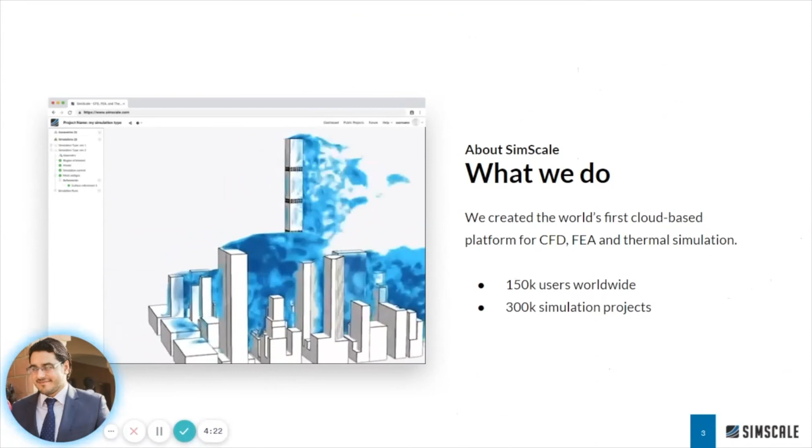SimScale is a German software company headquartered in Munich, and we have people all over the world. I myself am based here in the UK, and we have created the world's first cloud-based engineering simulation platform that specializes in CFD, FEA, and thermal simulation. We have hundreds of thousands of users worldwide, and SimScale is on the cloud.

Now, what does that mean? It means that SimScale can be accessed via a web browser. So a simple username and login will get you access to incredibly powerful CFD and other tools, which makes it incredibly accessible and democratic and easy to use.

Now, let me take a step back. What is computational fluid dynamics? In simple terms, it's engineering simulation used to model the detailed behavior of fluids. In architecture, engineering, and construction, we can use CFD to model various things, for example, the wind, urban microclimate, natural ventilation, HVAC, and thermal comfort.

With SimScale, you can access CFD on a web browser using GPU-accelerated cloud simulation. We have several new generation solvers, including the lattice Boltzmann method, which reduce by an order of magnitude the time taken to simulate real-world problems.

So this, you can see on the screen, you're modeling a transient wind, which is a real wind. Ordinarily, a simulation like this on a large model in legacy desktop tools might take days to do. With SimScale, you can do it in hours. So it's an order of magnitude improvement.

Some of the types of simulation we can do, for example, external simulation, you might use it for looking at building aerodynamics, pedestrian wind comfort and safety, wind loading, and a closer look at wind pressure coefficients. And you can do that from the very early concept massing stage through to design and planning level quality.

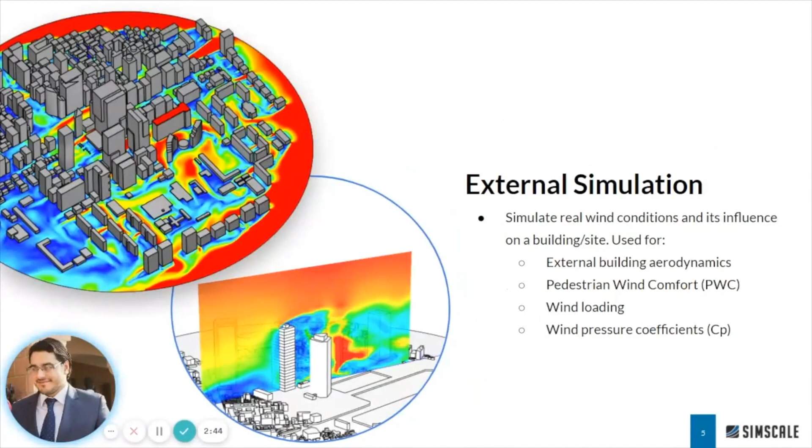Indoor simulation focuses on things like understanding the flow of air in and around a space, looking at airflow diffuser types in more detail, and modeling different types of equipment, such as underfloor heating, and also looking at thermal comfort. So this is all entirely possible right now.

The question is, what are the major trends we're seeing in building simulation over the next few years, and what is our response? Well, the first major trend is something called co-simulation, so we're applying the physics in CFD to complement thermal modeling tools. This is really important, and the reason is because a lot of these thermal modeling tools were developed 20 plus years ago when we didn't have the cloud, we didn't have the fantastic processing computational power we have now. So a lot of the physics in there was based on simplified relationships based on empirical modeling.

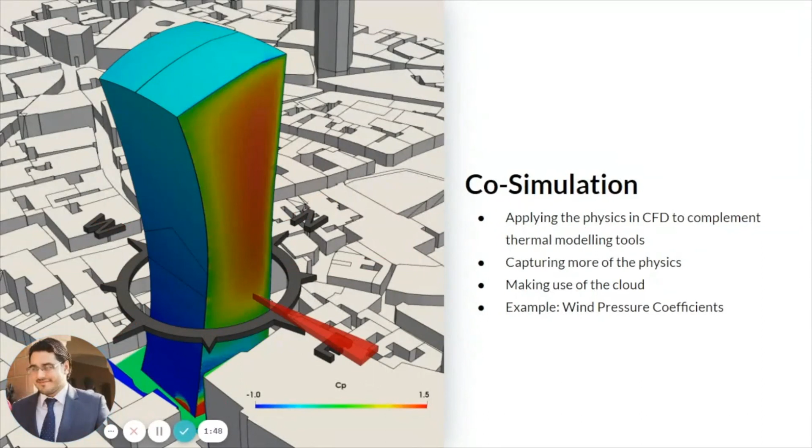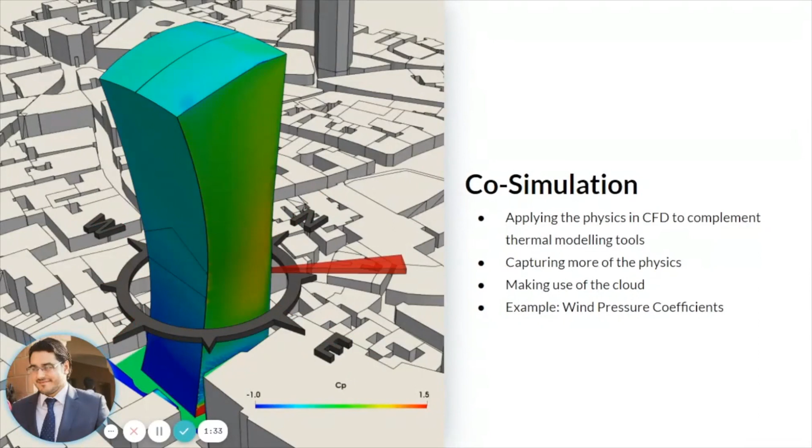We don't need to do that anymore. We don't need to shy away from that. We have tons of computing power available, so let's capture more of the physics, model the physics more explicitly, and let's bring this capability into the thermal modeling tools. We have some great examples where we've modeled the CFD generated wind pressure coefficients in SimScale and imported them into thermal modeling tools to make the accuracy of the dynamic simulation much better and higher.

That's just one example. The other trend we're seeing is, look, we have one world, why not have one model? Typically, we simulate the external environment separately and the indoor environment separately. What we want to do is couple these more effectively. An example, the wind atmospheric changes have a huge impact on the heating and cooling loads and ventilation. So the question is, what kind of solver do we need to be able to capture this and couple that environment?

SimScale have the next generation solvers, including the lattice Boltzmann method, that coupled with putting it on the cloud, using GPUs and really leveraging the parallel simulation capabilities makes this kind of simulation a lot more possible now and realistic. My final point is integration collaboration is very important.

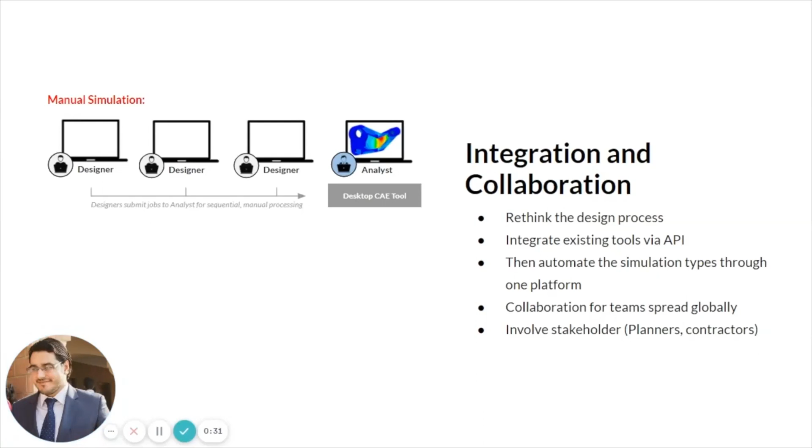The typical design workflow is very sequential. You'll have one kind of analyst simulation person, with different people sending him or her requests to do types of analysis on a desktop CAE tool. Really what we need to do is turn that around completely and give everyone, or a lot more people, access to different apps. So you might have a wind comfort app, a wind loading app, and architects, engineers, they can all access this, dip into it, dip out whenever they want to.

And this is automated using an API, and it's hosted on SimScale Workbench, so you can involve all the different stakeholders in there. So the three key points: co-simulation to capture more physics, and integration and automation. Thank you.